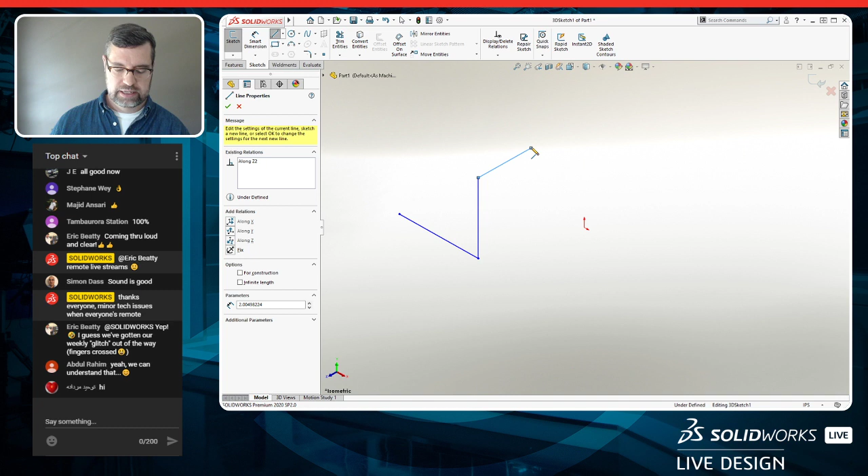So right now it's indicating that I'm in the XY plane. If I go ahead and click that and hit tab again, right now I'm in the YZ plane as well. And then if I want to be completely in a non-orthogonal direction, I can connect those two endpoints together. This is part of the reason why the Tinker toys are helpful, because this can kind of play tricks on you. But that's the idea, and the tab key is what helps to really facilitate that.

So that's tip number 1: get comfortable with the tab key. Tip number 2 is, if you do want to make sure you're locked into a plane, double click on it. Double clicking on the top plane locks my focus on that plane.

And now anything I draw is going to be in that plane. So we'll come up here, and there's quite a bit of symmetry in this design, so we're going to use a center rectangle.

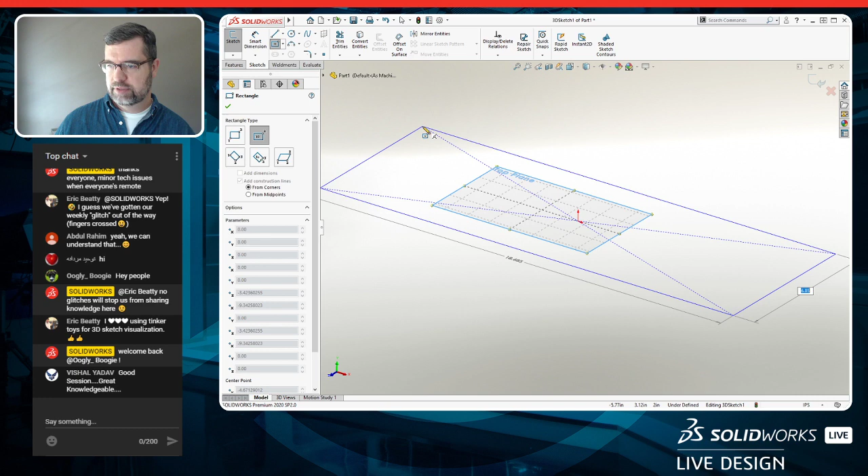Let's make this 33, and we'll make the other direction 60. Okay, so these are my dimensions. And again, you'll notice that everything I'm drawing ends up in that top plane, right?

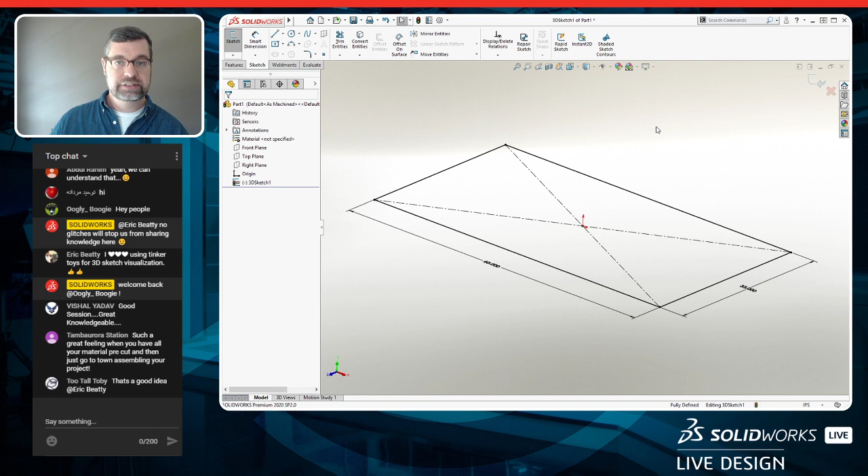And when I get out of this, if I just double click in the graphics area, now I'm still in the 3D sketch, but I'm back to drawing in any plane that I want. So the next thing we're going to do is draw one of the legs.

So we'll go ahead and click this endpoint and draw this down, and we'll make this 28. Now I'm actually going to avoid putting the dimension on here, because this is the third tip I want to give you guys.

When you go to add a dimension, by default it attempts to add the dimension in the plane that's most closely parallel to the screen. So if I select this line and draw off my dimension, you can notice it's orienting most parallel to my screen. If I escape out of that and rotate this around, I can dimension this way, and it's now coming off in the XY plane.

So here's my third tip: if you start your dimension and realize you actually want it oriented in a different plane, the tab key becomes your friend here. If you hit tab once before you place the dimension, it almost looks like it disappears. If you hit tab again, it toggles the dimension to the other plane.

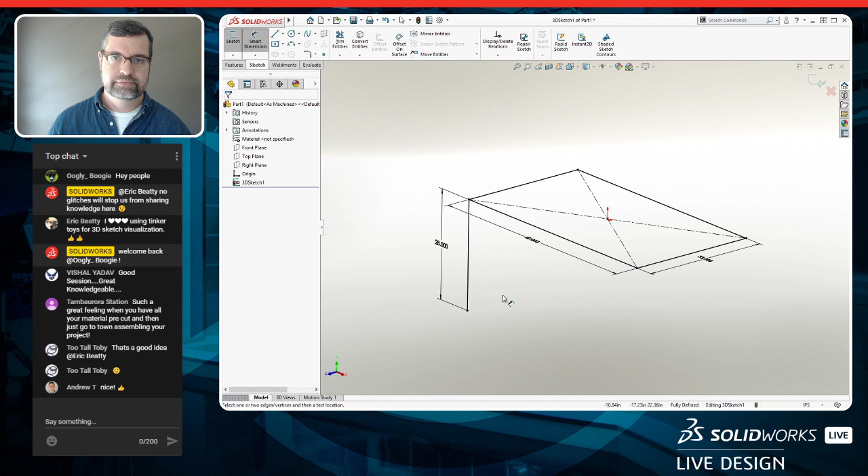So, three tips for 3D sketching. Like a lot of things, it comes down to learning it, practicing it, and then keeping it simple.

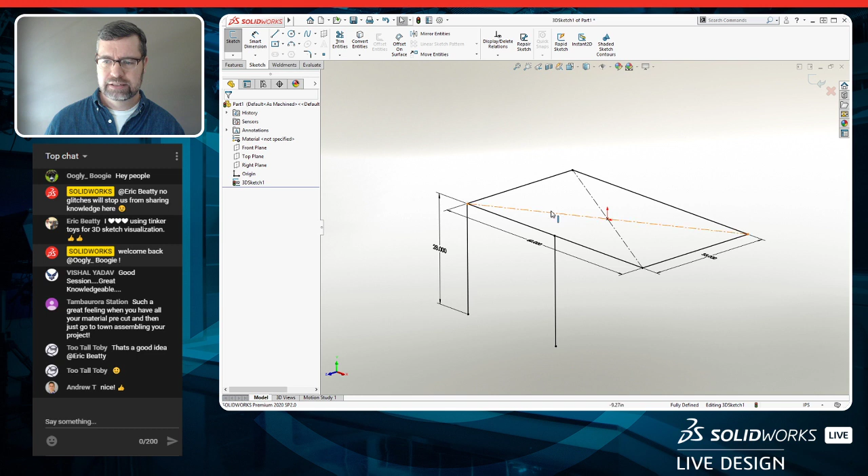I am going to go ahead and add the center leg in here. We're going to make this and this equal to each other, like so. That's going to be our layout for the majority of this design.

Okay, so here we go. So we've got our layout, that's looking good. Let's go ahead and start adding our lumber to this kind of skeleton sketch that we have.

My colleagues have done a really great job of giving some insight into how to build custom profiles. If you haven't watched Mike Sandy's or Jordan Tadic's or Juan's, those are all other great examples of utilizing the Weldment environment. They also have access to wood profiles you can download, or tips on how to create your own, so I'm not going to go into that today.

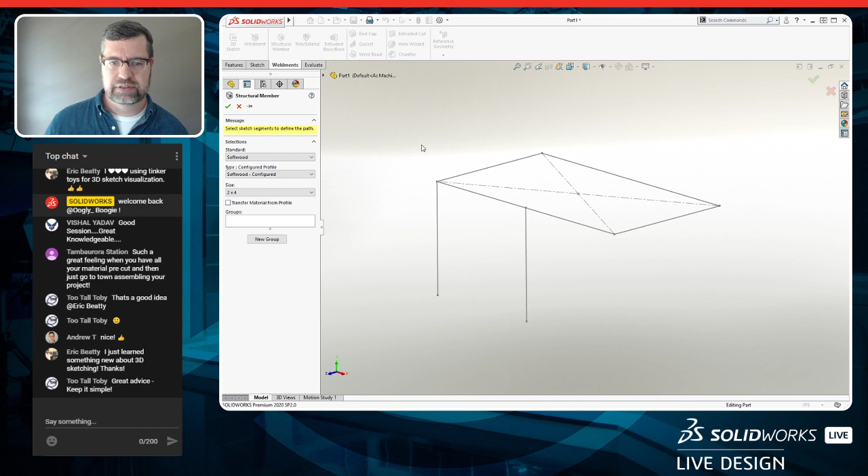We're going to focus on just a few other things related to building this out. So here we're going to make this out of 2x6, and we'll go ahead and place it on, just start picking the lines we want to add this to. Let's kick this around to 90 degrees, and we'll locate our profile to this point right here on the corner.

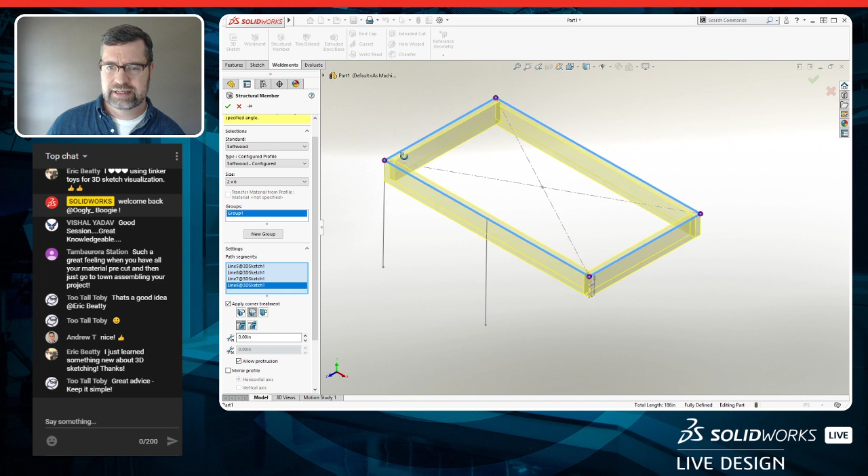Okay, so at this point, let's also select, now that we've got it oriented. I like orienting it first personally, and then I come back and pick the rest of my segments. We're not going to miter these, they're going to be basically end-butted. So we want to make sure this one gets switched over, like so, and same with this one. Right, so that looks good.

Okay, so we've got our first box in place and going, and now let's just use a simple pattern to make—we're going to basically do 3 stacks of those. So we'll come in, grab our pattern, and indicate the direction we want to go.

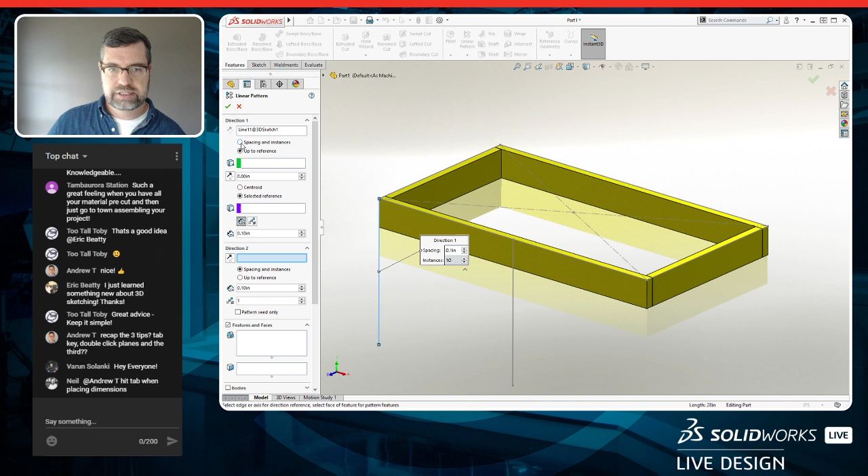This is going to be just basic spacing. These are 5.5 inches—typical 2x6 is going to be 1.5 by 5.5. So we're just going to space these at 5.5, we'll use 3, and then we're going to choose the bodies that we want to pattern.

Right? So something like that. That looks good. And we'll go ahead and hit OK.

So as I said, I made these out of pine. That was one of those things where there were kind of three things that I looked at. The materials had to be readily available, I didn't want to break the bank, and I wanted it to be food safe. So I ended up doing it out of pine.

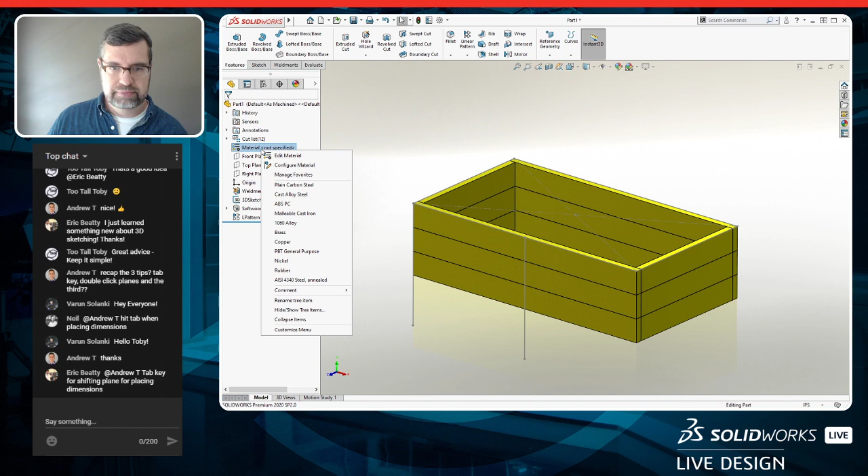So let's go ahead and add a material to this. There's actually some wood placed in your libraries, in this case pine. And just as a side tip, a lot of people don't always realize that if you use materials a lot, you can come over and click on favorites and add it to your favorites list. Obviously order these however you use them most, but this makes them really accessible so you're not having to go through the full library each time, right?

So there we go, we're going to go ahead and make this out of pine. Looks good. All right, so we'll go ahead and add the legs in.

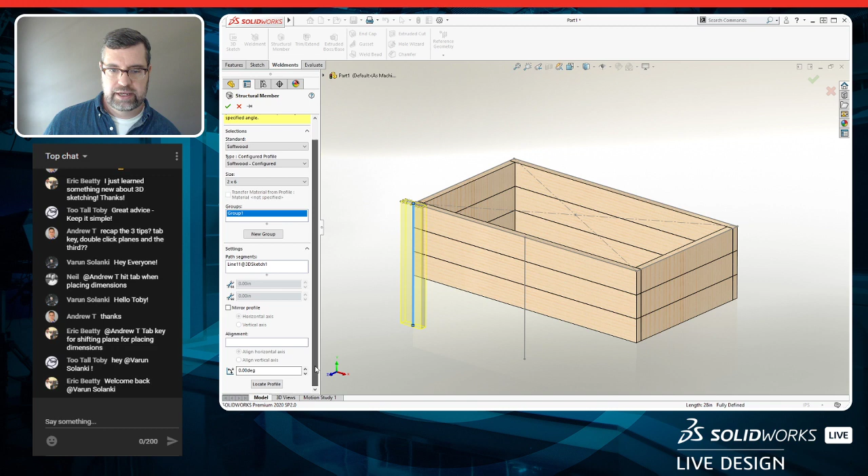So again, we'll use this as a structural member, 2x6, grab this line right here, locate that to this corner, like so, and that looks good.

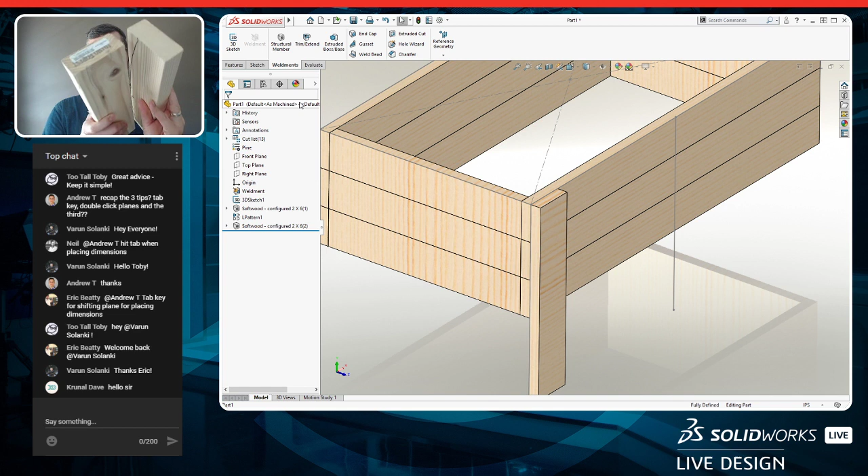Now we're going to do the other side of the leg too, and this is one area where I did tweak the library profiles, and I'll explain why. Specifically in woodworking, it's not uncommon to take two boards and lap them right over the top of each other, so that you've got something to screw into. So what I did with these profiles, and you may have noticed it already, is I went in and added those common lap points to my profile.

So if we rotate this around 90 degrees, and then go in and hit locate profile, what you'll see is I've gone into that library feature part and added those common points where you're typically going to overlap another thickness of wood. That's oftentimes going to be 0.75, which is that point, or 1.5, which is this point right here.

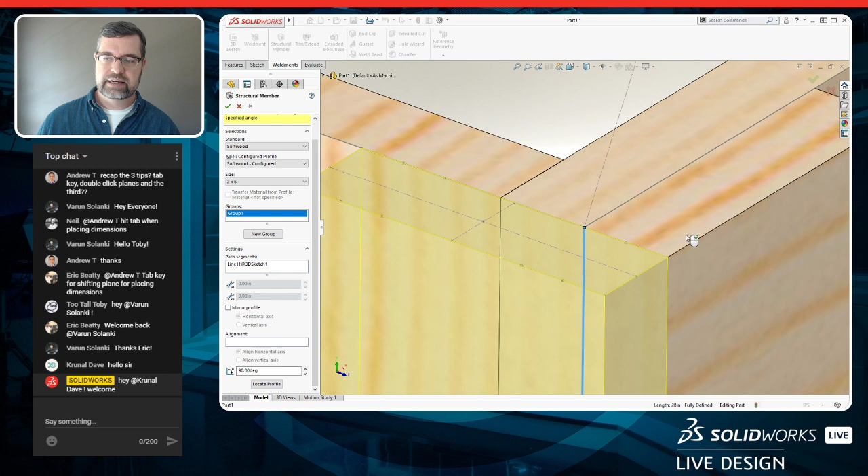So by doing that, I don't have to create an extra sketch just to place this board. I can just pick that from my profile. Again, it just saves me some extra time and simplifies how the model looks, keeping it nice and clean, right?

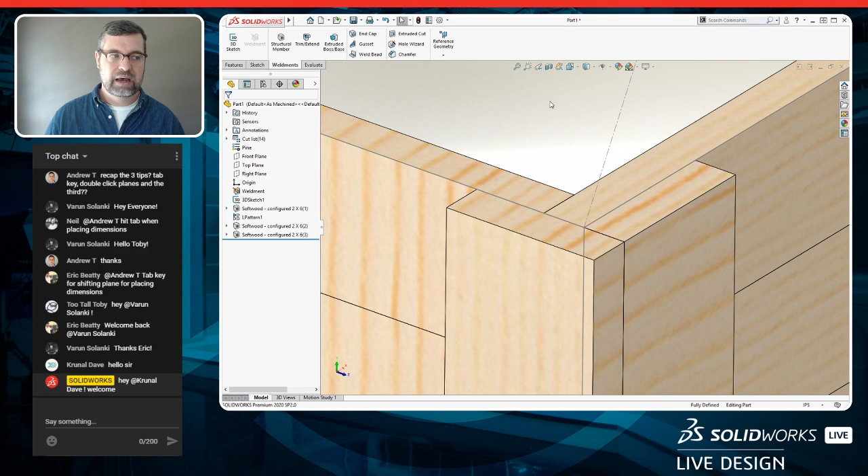This actually can be applicable to actual metal welded structures too. If you've got your plate steel set up as profiles, oftentimes you may want to do a scenario where, if this is your plate and this is the radius on your tube, you can run your plate right up on the tangent of that radius, and that gives a spot for you to lay your weld on the tube, if you're going to actually put plate steel on your tube.

So incorporating that point into that profile just helps you add those offsets in, those really common offsets that you're doing a lot, without having to create an extra sketch line or do some crazy things with your skeleton sketch. So just something to keep in mind - if that's something you do, then yeah, that's something I would definitely recommend.

All right, so let's go ahead and also add in the center leg. We'll locate the profile, we're just going to center that up right there. That looks good.

And like I said, there's a lot of symmetry to this design, so let's go ahead and get back. So we added our center leg to this design, and that was just a matter of coming in and selecting the line where we're going to add that 2x6, and then we're going to mirror these others to the other side. So we'll come in and do a mirror.

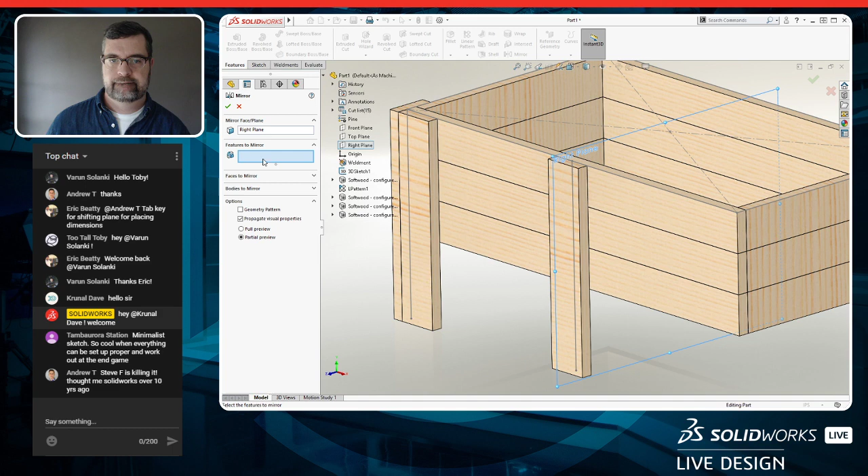Again, we'll do the bodies to mirror here, here. That looks good, right? So we've got half of this ready to go.

Okay, so let's rotate this around. We're going to go ahead and add in the runner, and the runner is what's going to support the slats that we have coming across here.

This is another great tip that a lot of you probably are aware of, but if you click on a face and you want to pick the face behind it, just hit this icon, select other. It gives us a chance to pick that bottom face of the board where we want to start our sketch. And I have my sketch, like insert sketch, mapped to a hotkey.

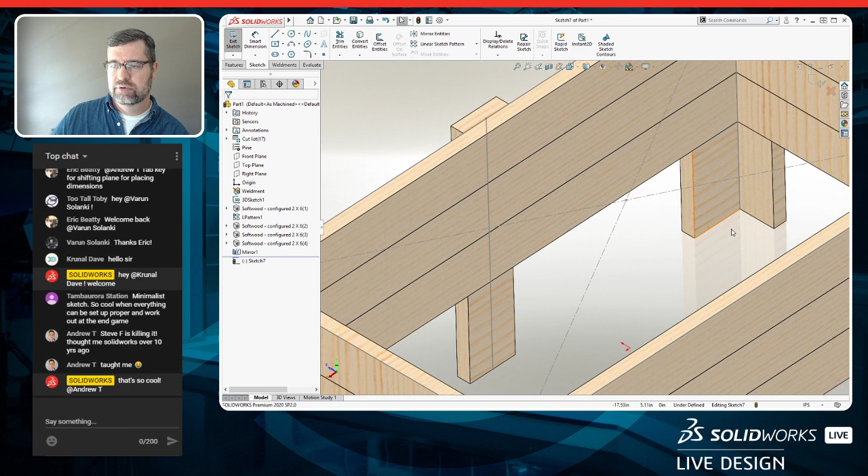Some of you may have it mapped to the shortcut keyboard or mouse gestures. I use it enough, and I like keyboard shortcuts, that I just map it to a key. Maybe in the comments, what do you guys use? Do you like using the wheel, or do you like using the shortcut keyboard? What's your favorite way to get to your commands?

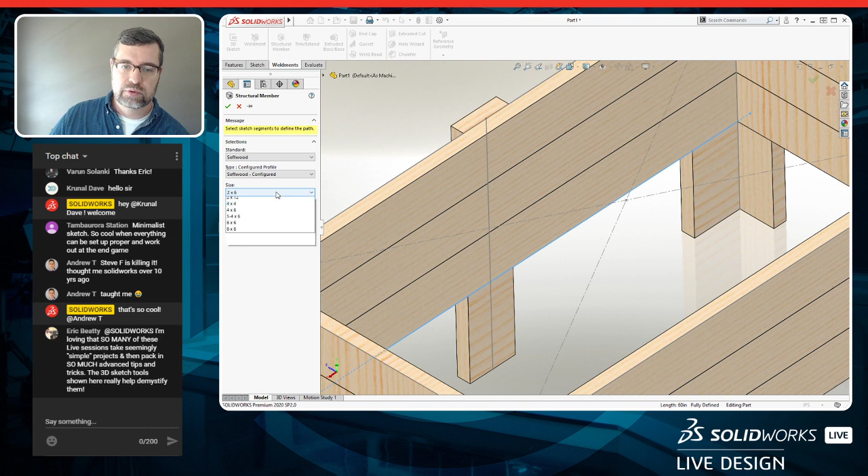Okay, so here, let's go ahead and just take that and convert the edge into a sketch. And then we're going to select to add this, it's going to be a 2x4 that we add here. So we'll select 2x4, select the line. And again, we're just going to orient ourselves 90 degrees and locate the profile.

Okay, so now we've got the board that's going to represent where we're going to put our slats for the runner. And the thing about this is that right now I'm interfering with the geometry, and I know that, I can see it.

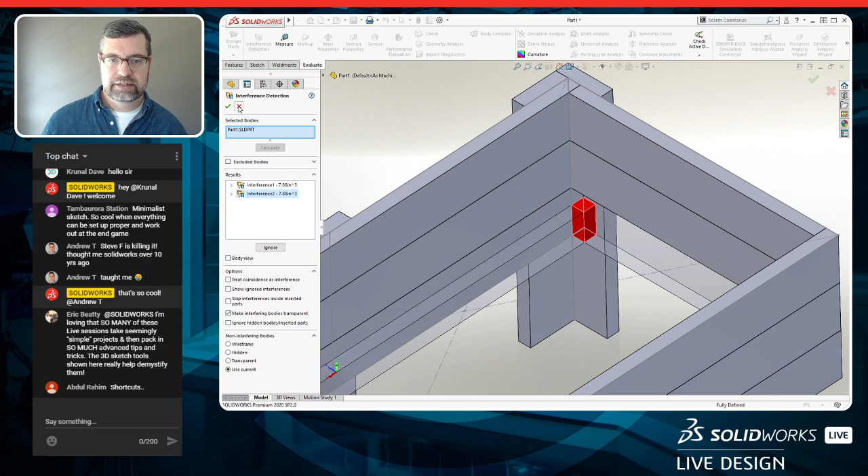But just as a quick tip, interference detection actually works inside of parts. So you can go to the Evaluate tab, select Interference Detection, and calculate, just like you would in an assembly. And you can see exactly where you may have interferences with your weldment. Okay, so keep that in mind as you're designing. You can do interference detection on your weldments.

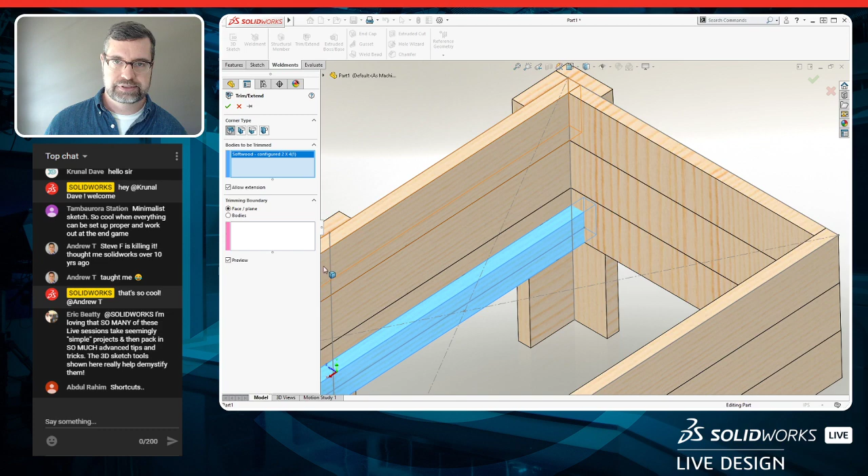So what I'm going to do to get rid of that is use the trim extend command. So trim extend, we'll select what we want to trim, which is the runner, and then we're going to pick the two faces that we want to trim up. So these two faces. And then I'm just going to draw your attention to this section down here at the bottom where we have the weld gap.

And weld gap can be really handy for when you're doing actual steel structures. One of the things I would recommend is definitely talk to your fabricators and your welders, because they oftentimes are going to have, you can make their life easier a lot of times if they have just a little bit of play in the structure, in the cut lengths, because you can fill in or bridge a lot of gap with weld. And it may make their life easier as they go to fixture it up, because they're not having to fight it as much.

The other nice thing about this is that if for some reason it was too long or it didn't quite fit, that typically means they've got to do a lot of grinding on the end of it. So main takeaway is, talk to your welders. You can make their life easier, and you can design better products in the meantime as well.

But what I'm going to do is actually add a gap in, because wood isn't always perfectly straight. And sometimes it's got different cambers to it and different bends. And you may be, if you're just slightly out of square, having a board that is the exact length, you're going to end up fighting it and putting undue stress on it.

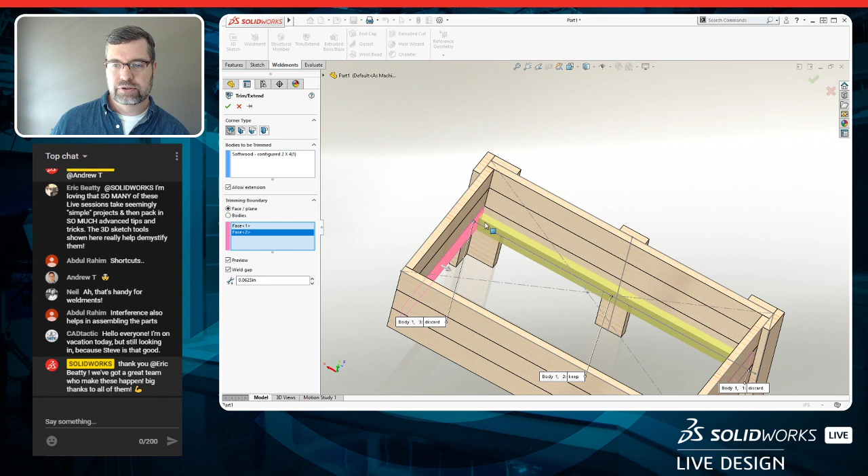So I put about a 16th inch of a gap in here. That ends up being an 1/8 inch either way. And it helps to, especially in a structural setup like this, make your life a little bit easier. You're not fighting that board to get it in. It just fits in there nice and you can center it up accordingly.

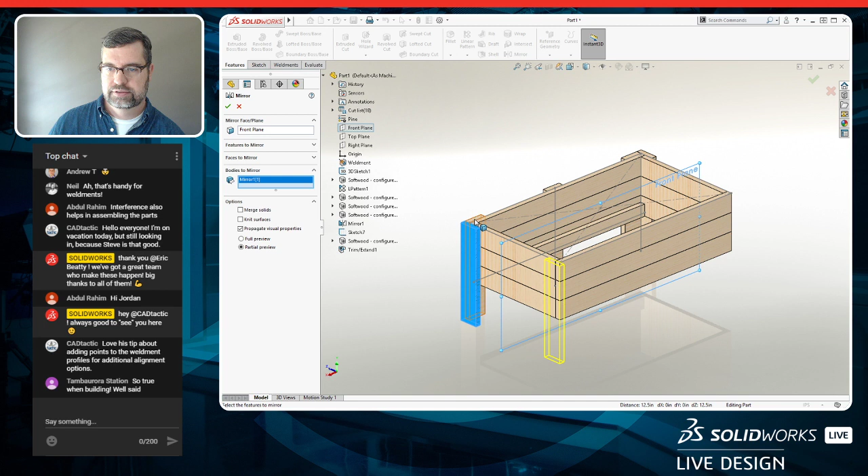Okay, all right, so there's our design. We're going to go ahead and just mirror all of that to the other side. Okay, so we're going to do that across the front plane. We'll grab our bodies, and that's just going to be each of our legs and that runner piece.

Okay, all right, so here's our design so far.

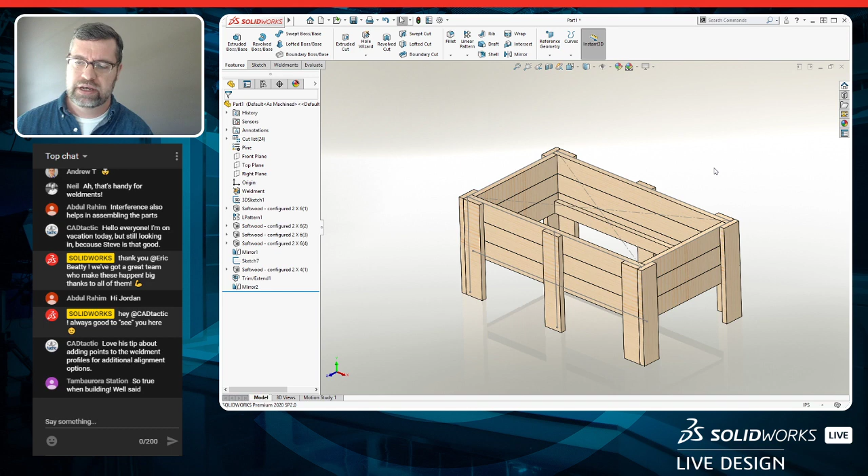Let's go ahead and add in the slats. Again, this is just going to be a sketch that we start on this face. Now remember, we've got a little bit of a gap here, so I'm actually going to pull this line up, pull the edge off the board of this face into my layout sketch, because I want the slat to bump right up against the edge face here, and this is going to be again a...

2x6. So yes, these are beefy garden boxes. All right, so it's going to be 2x6. We'll just go ahead and locate the profile right here, like so.

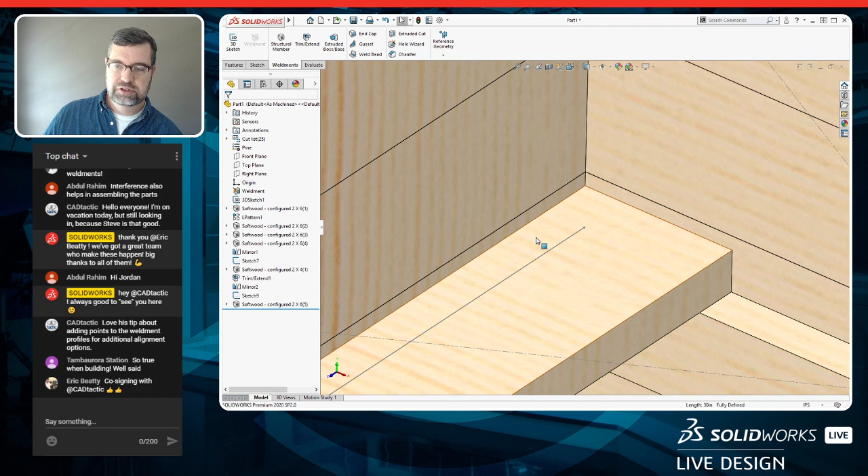Now, here's the thing about this one. This doesn't have any interferences, okay? The 2x6 butts right up against this face, and the end of it butts right up against this face. But something to keep in mind, even though I don't have any interferences, I can still use the trim extend command to build in the weld gap.

So instead of having to mess around with the length of that line, I can say I want to trim this. You go ahead and pick the faces that you want to reference, so this face and this one. I'm just able to use that feature to add the gap in that I need, right? So I'm just going to go ahead and hit OK.

Same idea here. When I go to put this board in, I don't want to have to fight it, right? To get it in there, and a little bit of play on each side just ends up making everybody's life a little easier when you're building something like that.

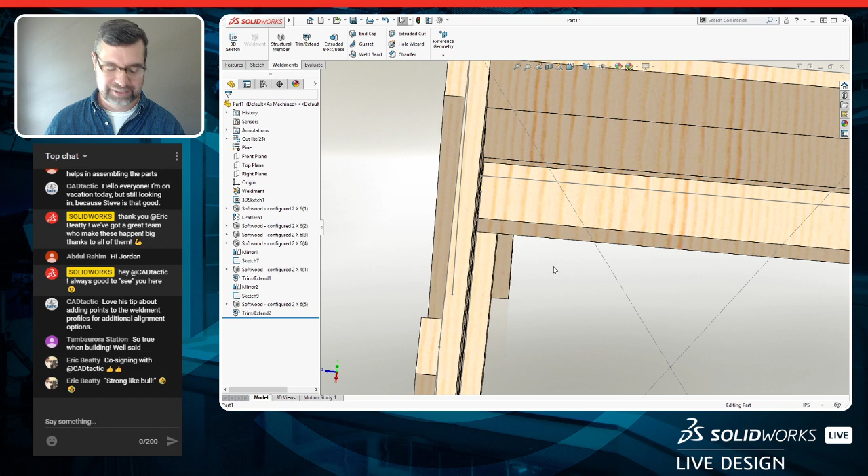Strong like bull. Yeah, exactly, Eric. We have a saying in Indiana that when in doubt, build it stout, right? I think that's probably kind of a ubiquitous saying, but we tend to own it.

So, at any rate, we've got that in.

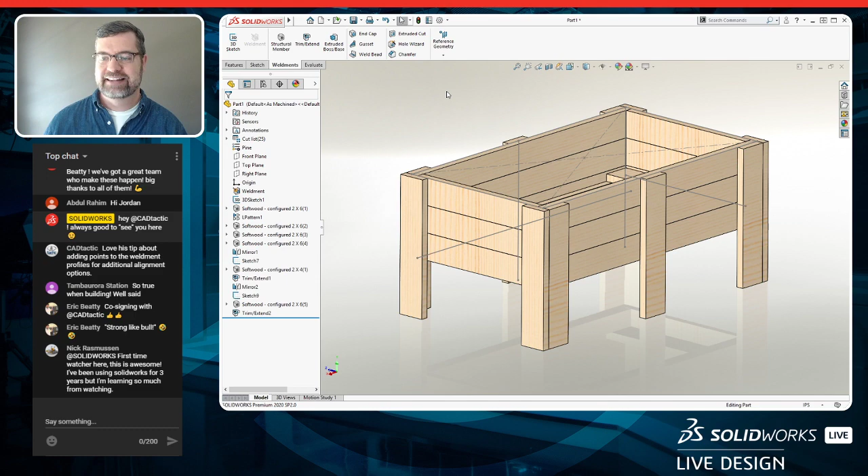Now, this presented one of those interesting challenges that SolidWorks was great for solving. When you do a box like this, you actually have to have a way for the water to get out of the box, so you can't just butt these slats up one against each other all the way across. You actually want some spacing, and I was shooting for about 1/4 of an inch or so.

And I was like, oh man, now I've got to figure out how many of these I need and all that stuff. And then it dawned on me - wait a minute, we've got this feature inside of linear patterns that allows me to basically just indicate up to reference. So I can pick the direction that I want to do the pattern, and I'm going to use the up to reference, and say I want to basically pattern up to this face.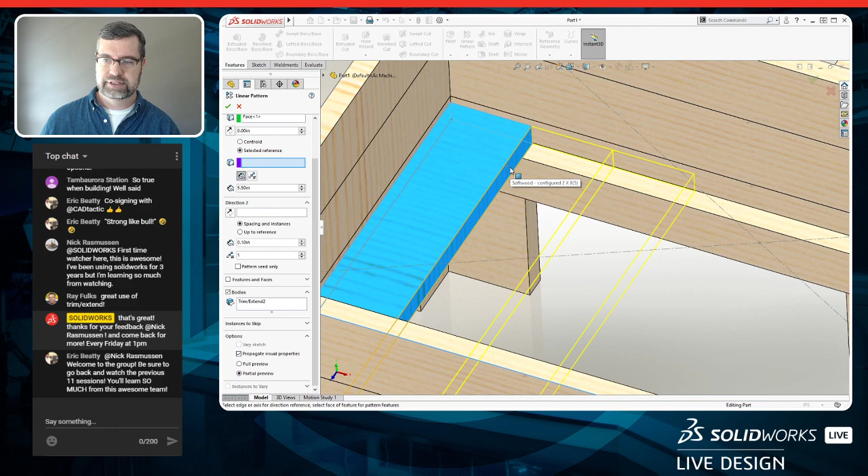And I want to select the bodies here that I want to add, which is this one. And then I can indicate where I want it to be kind of referenced from. In this case, I want to use this face here.

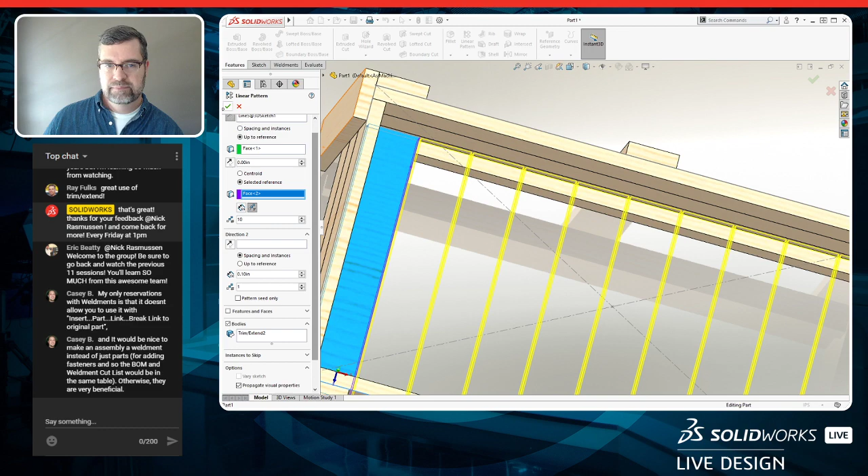And then I'm going to start playing around with the number of instances I need, right? So now visually I can just start seeing, okay, it looks like 10, 10's going to fit great. You could also do this based on just driving the distance that you want, but that worked great, and like I said, I was just wanting something fairly close.

And this is one of my other tips. A lot of times I think we have to use the measure tool to figure out dimensions, but a quick thing - if I just pick two faces, hold down Control, pick two faces, you can identify the distance right there in the normal distance down here at the bottom of the screen, right?

So yeah, it's looking pretty good. We've got our spacing in there that we need. And the last thing we want to do is put a little bit of trim around the top of this. It just kind of cleans it up.

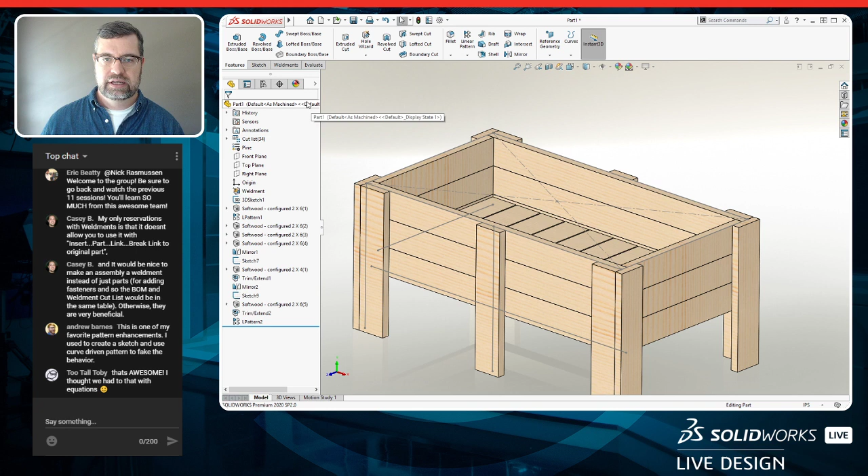You don't have to do this, but inevitably you're going to be leaning over and likely need to set something on there. So we're going to go ahead and do a structural member. I'm going to put a 2x4 around the outside.

Having those offsets in your profile becomes super handy, because you notice I haven't had to do a whole lot of sketching other than this line and this line outside of what my skeleton sketch was. So if you come in and locate your profile again, I can simply pick the point that represents my 1.5 inch offset, and that gives me the perfect amount of lap to where my board is.

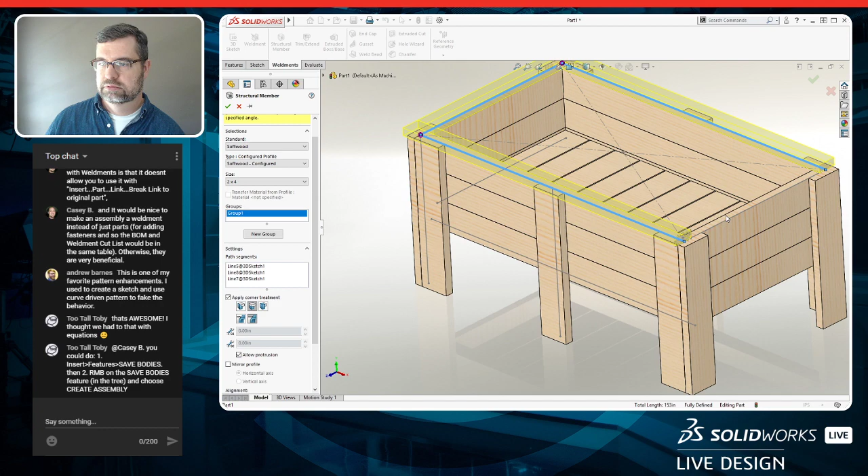Easy enough to do. We'll go ahead and pick the rest of our lines. Now, this is an option - depending on your comfort level, you actually could just leave these just like this. And I'm going to grab my endpoint here and set this one so it extends out.

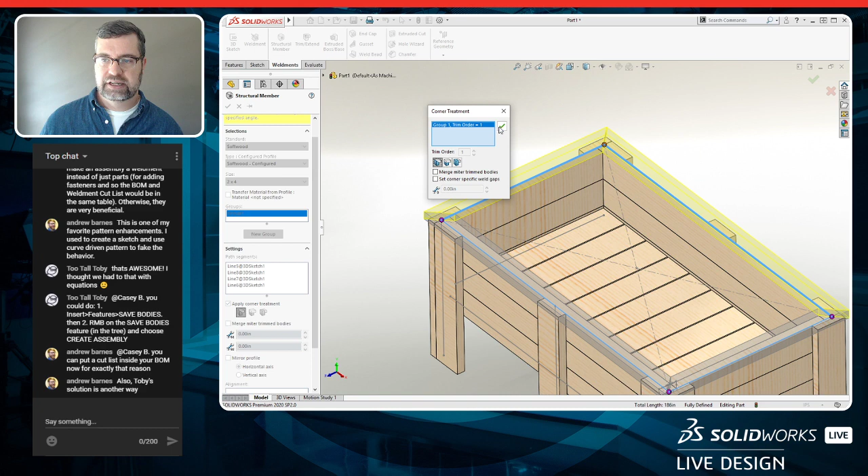If you don't have a miter saw, or your miter saw only does straight cuts, this is an easy way to just put a nice little trim board around the outside without any additional complication. Alternatively, you can throw a miter in there, and it adds a nice little touch, gives you a nice clean corner. So it's up to you based on the tools you have and your comfort level. A straight chop will give you a real nice trim as well - miter just adds a little bit extra.

All right, that's looking good. Let's go ahead and save this, and we'll call this garden box.

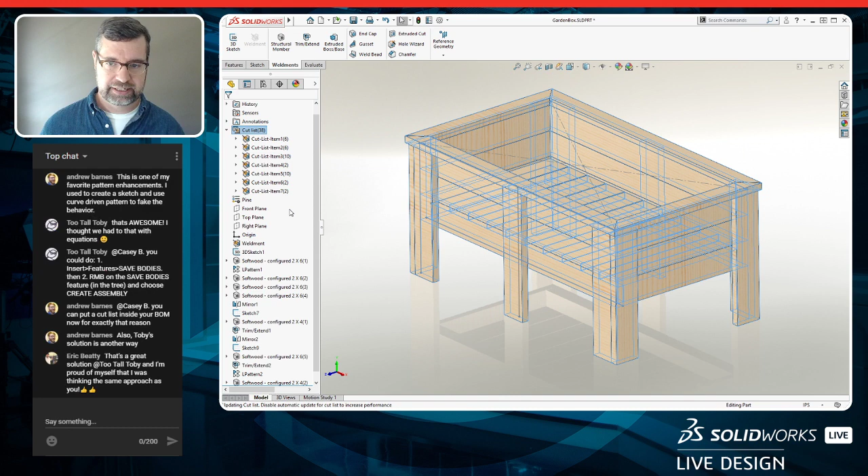So perfect, let's do some stuff with drawings now. If you're kind of new to Weldments, we've got our cut list - simply tell this to go ahead and either update or update automatically, and it'll constantly update as you're designing. Now I've got all my cut list items, which is great. Let's go ahead and create a drawing. I want to show you a couple things with drawings that will be helpful for this project, but also just in general when it comes to documenting your designs, whether they're steel or other.

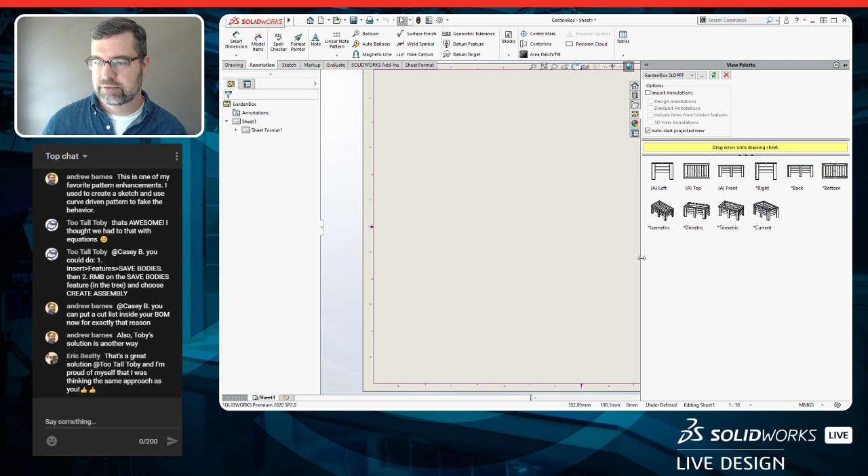That'll be handy. So let's start with, we'll put an isometric view on here, and let's just hide sketches since we're not going to use those. Now here's a couple things - maybe you're using your work computer, you've got your work templates. This is something we want to document in inches as opposed to metric.

So down here in the right-hand corner, easy way to switch your units - just come up here and say I want to do this in inches, since this is just kind of a home project. So that'll switch our units, and now we're good to go.

Let's go ahead and also add a Weldment cut list table to this. So we'll do Weldment cut list, just accept the default, which will work good for this project.

I also want to point out that all of our lengths are in inches, which is great, that's what we wanted. But now also, they're in decimals. I worked as a machine designer with fabricators for a while, and oftentimes they're just cutting the steel with a chop saw or a bandsaw. If it's a one-off, a lot of times it's actually a guy with a tape measure, and he knows what the decimal values are, but a tape measure obviously isn't in decimals, so you can make their life a lot easier if you switch it to fractions.

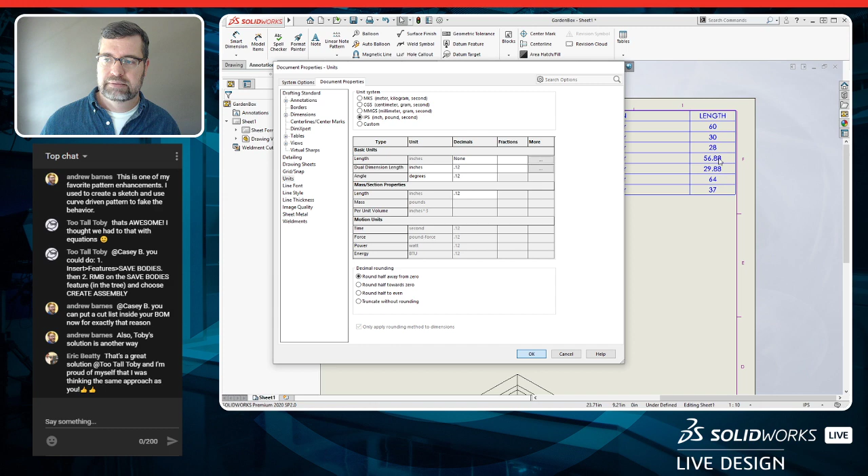And your options - you can come in here and say edit document properties, it'll take you right to this area. And you can say I want to do this in fractions, let's say 16th, and round to the nearest fraction. That will actually control not only your dimensions, but it controls how your table is displayed as well. So that drives both.

All right, let's add some balloons, right? So how are we doing in the chat here?

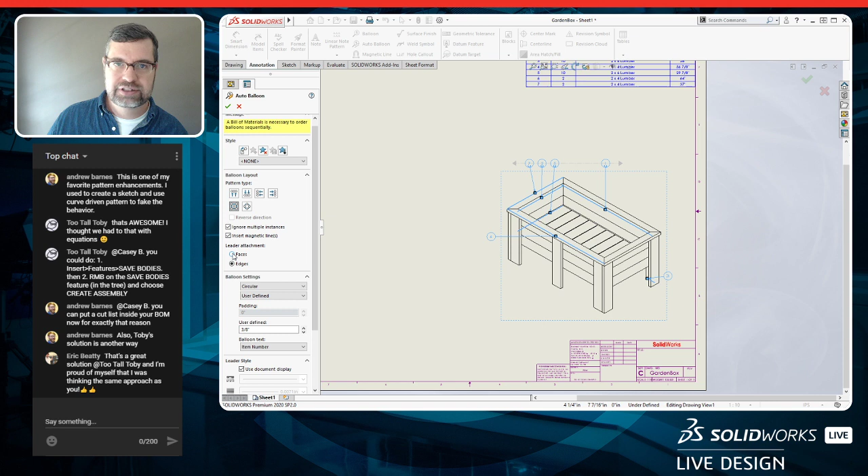We'll go ahead and auto balloon. Couple preference things, just me personally. When you have a lot of line-on-line contact like this part does, one of the things that's kind of handy is you can change the leader attachment so that it's attached to the faces. This will reattach the balloons so that their endpoints align on the face, so you can readjust those to where they need to be.

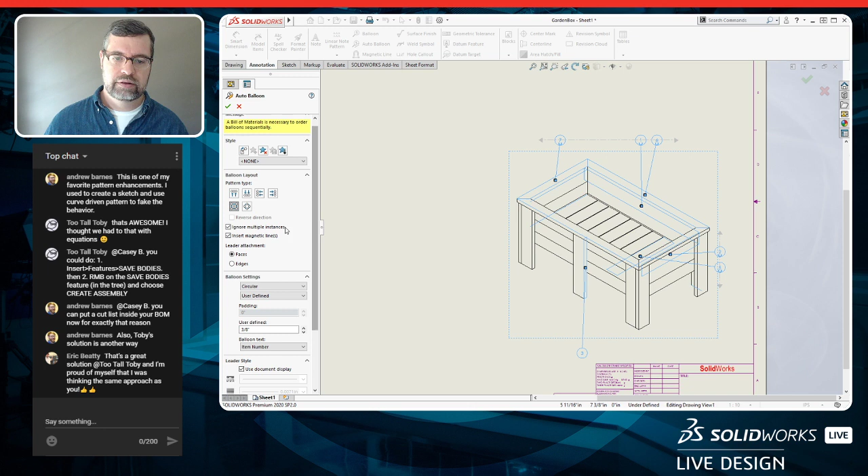The other thing that I find helpful sometimes is to uncheck this ignore multiple instances. Now, yes, you will end up with a lot more balloons, and there's situations where you don't always want to do this, but it can come in handy when you're looking at a certain part of the drawing and want to verify that all three of these boards are item number 2, or whatever it might be. It's also handy just to be able to clean these up so you can see exactly the face or the part that it's associated to.

Completely up to you on what your preference is, but these are just some things that personally, and actually when I was building this, I was like, man, I really wish I would have called out some of all these boards so I could easily look at them and see what they were.

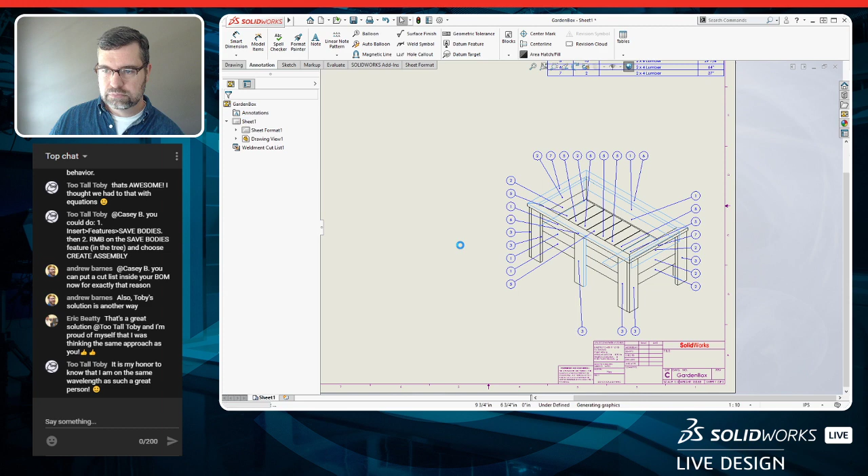All right, so that looks good. Let's add a couple more views on here. So let's add our front view, put a top view, and then a right side view.

And I'm also going to go ahead and just change the scale of these. Let's just back them down a little bit. Maybe not that much, 1 to 100 is a little much. We'll do 1 to 12 here.

Obviously, you can come in and add some dimensions. Another thing that just came in handy when I set these, I actually put them up on concrete blocks, so I made sure everything was level, and I needed to know center to center of the legs. Obviously, if I throw a dimension from here to here, that's center to center.

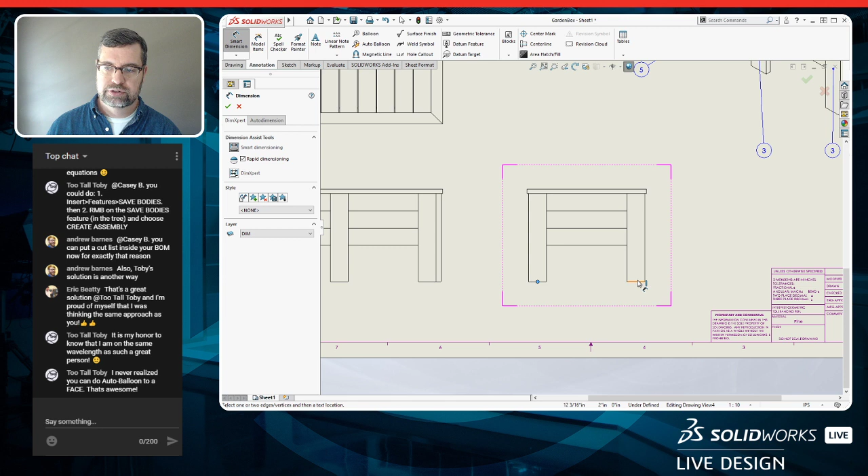But just for the sake of showing another option, if you right click on an edge instead of left clicking, you have the option to say select midpoint. And then you can do it over here too. I can say select midpoint, and that'll give me the distance. You can just say I want to keep this dimension driven, but that now will give you your reference the center line of those edges. Like for me, I could tell exactly where I needed to put my concrete blocks that I set this on.

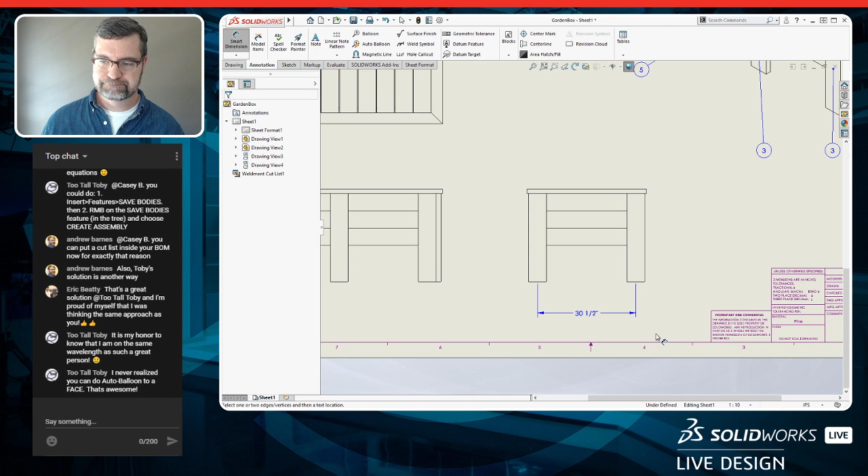Another thing that's handy here as well is you can come in and do a detailed view. Let's put this on here. Because maybe I want to be able to reference the distance in between my slats.

So this is where rounding the fraction can come in handy. If you remember, the actual distance between these two was 0.22. In woodworking like this, that's like a 30-second off of a quarter of an inch, so it's easier just to say I want a quarter of an inch. So that can come in handy.

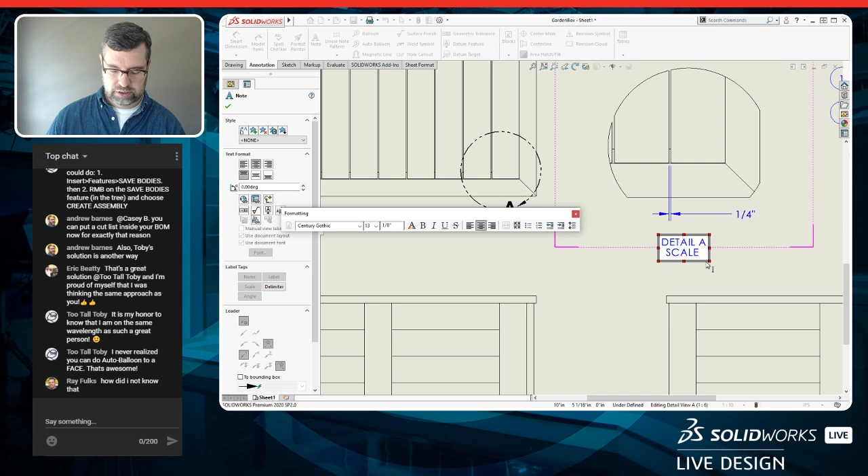My other tip, specific to detail views, sometimes people don't realize this, but if you want to change the scale and the detail, you can say, well, maybe I want this to be 1:8. You can actually do it right here. If you just double click on the annotation and say I want this to be 1:8, it will actually drive the scale of the detail view. So another little time saver - you don't have to make your way all the way over to the properties, you can just manage it there.

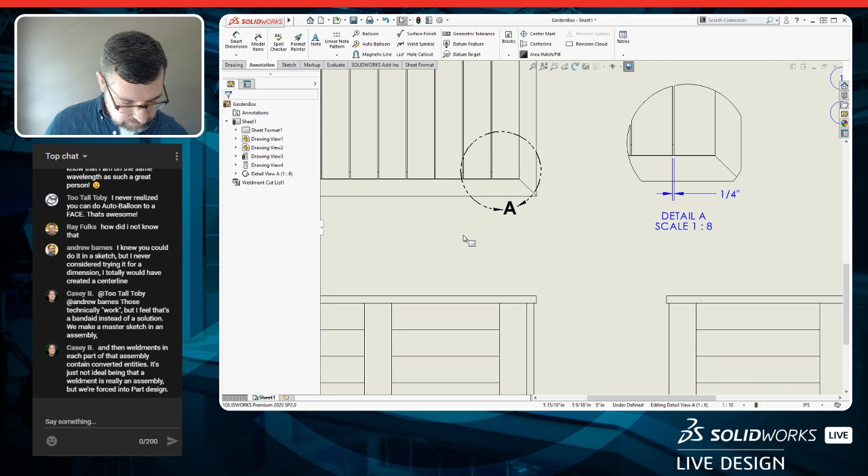Okay, cool. So good to go there.

So let's do this. This came up in some of the other live sessions. People were curious how to go about detailing parts on a weldment. I'll show you two methods and try to give a little bit of insight on why you'd use one over the other.

The first method: you come in and say drawing, choose a normal model view. We want to make it for the garden box. You can then say I want to do a top view, but select the bodies. If you choose this, it's pretty straightforward. You just pick the body you want, hit OK, and it places the top view of just that body in the orientation that it is in the model.

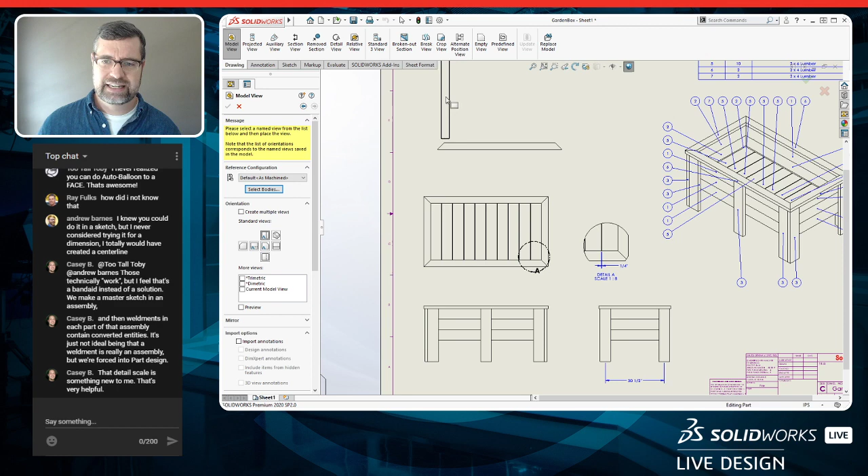Where you have to be a little careful, where it starts to break down a bit, is that it takes the orientation of the model itself. So if I do a model view again for the garden box and select the body, here's the thing - if I select this one, it's going to take that orientation, which isn't overly ideal.

You can actually get around this, and this tip applies to a lot of views - you can just rotate it. If you pick the rotate button, you can take the drawing view and spin it around to a different orientation. Why am I showing this? Well, it can be a down and dirty way to get a detail of just that part.

But it's also helpful if you do sheet metal weldments. So if you have multiple sheet metal parts and you need to show the flat for one of the sheet metal pieces, that's a way to get the flat into your drawing.

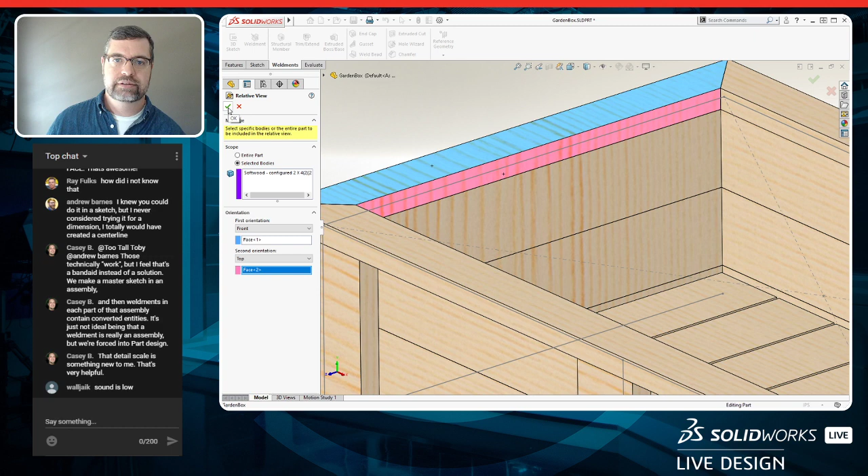The more robust way that gives you more control is to do a relative view. If I do relative view, I can select the model I want to use, select bodies, and choose this body. Then I can say my first orientation, my front, is going to be here, and the top is going to be this - so I'm actually controlling the orientation of the model.

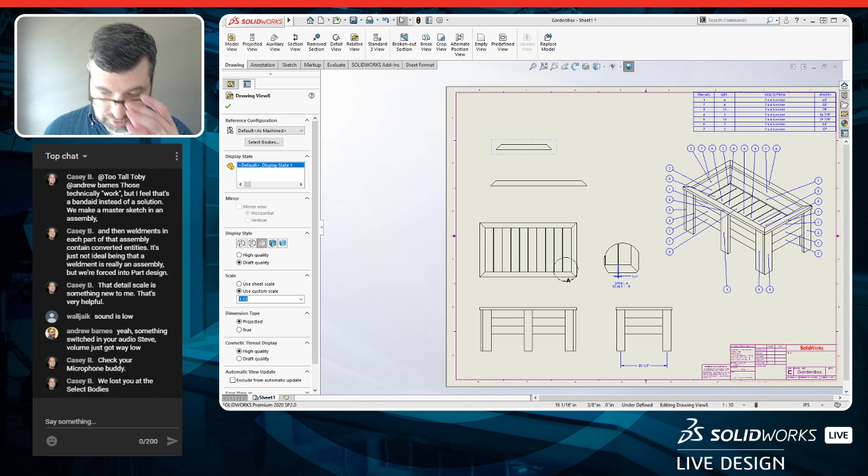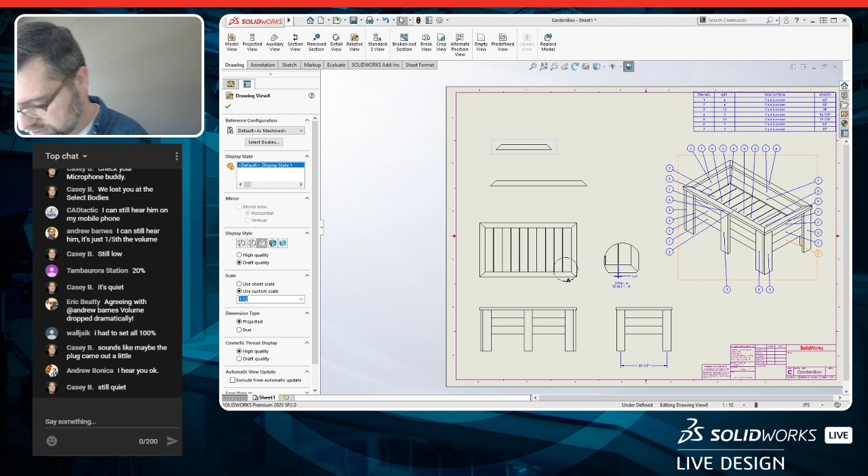My sound suddenly got... not as loud. Let's double check, make sure my microphone is still set. Turn up the gain - it's still showing that, let's turn the gain up a little more. Check, can you guys hear me? Lost me on select bodies. Are you guys hearing me now, any better? Something switched in my audio. So you can still hear me on my phone, okay that's good feedback. Are you guys able to hear me at all, or is it just quiet? It still says I'm using my mic here, the one I've got set. Still low. Okay, let's try to push on - maybe just try to turn the volume up a little bit. I'm not exactly sure why all of a sudden it's changed. Set to 100%. All right, sorry guys, I'll just try to speak louder. I'm not exactly sure what's causing it. Just speak in all caps from now on - I'll speak extra loud, we'll pretend like this is all in caps for right now.

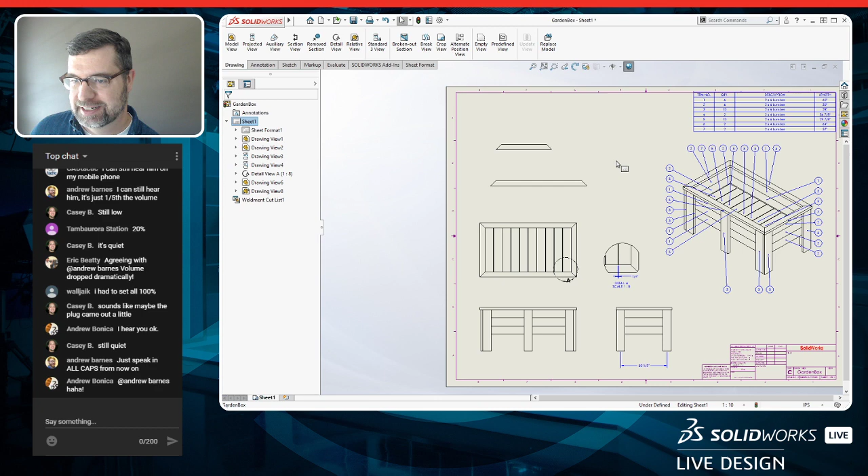Sorry about that, guys. So here we go - lost my train of thought. Okay, so here's the thing.

So now we've got the relative view. Another little tip here is that if you add the relative view - now it's gone completely. It's showing that it's on here, tough go at it today. Hey, we're back, okay, cool, all right.

So here's the thing: relative view gives you the most amount of control with how you place and how you orient the model.

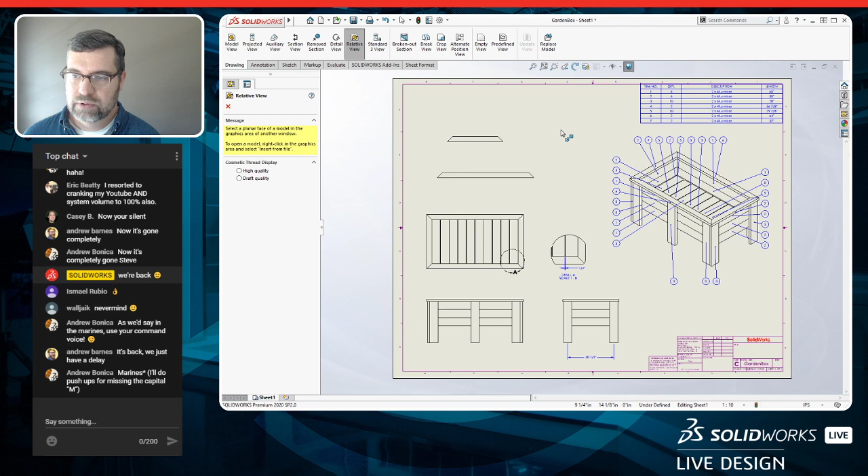Here's a little trick though - if for some reason you need to place a relative view that isn't the model you have on screen, you start relative view, then right click and say insert from file. This lets you go out and browse a completely different part file, and it'll allow you to create a relative view of that different file. Where this comes in handy is that you can create these details on different drawing files. So that's a way to do that - you just say insert from file, go out and browse, and it'll grab it.

Cool, so we've got that. We've got our two details. That's good. Next thing we want to do here, let me show you one other trick. A lot of times when you're creating these types of views with details, you want to put almost like little mini title block pieces of information on the drawing. So here's a little trick you can do.

Create your note, and the first thing I'm going to do is lock the focus of my view by double clicking on it. So by double clicking on it, anything you do now, any note you add, doesn't matter where you add it — I could literally add it out here, just make a note. This now allows you, if you move that view, that note will come with it. So that's one of the advantages of double clicking on the view to lock its focus: the note will travel with the view. And to unlock the view, you just double click on the drawing.

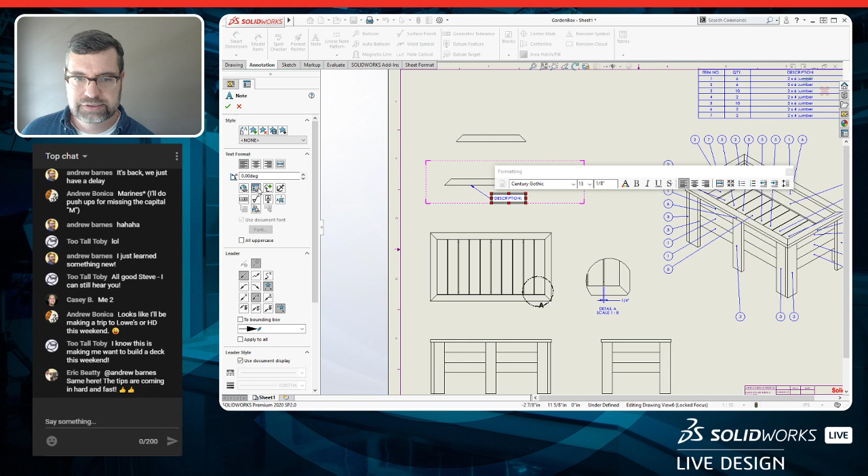So I'm going to lock my view. I'm going to come in here and add a note, and I'll use the leader just initially, okay. So we'll say description, and I'm going to link it to some properties. We'll say we want to link to the component to which the annotation is attached. Now here's the thing — this option right here, at least for weldments, only shows up when you've got a leader line attached, okay? And by selecting it, that's when the property names show up. So here's my description. I'll say okay.

I'll hit enter, and we'll do length as the other one. So we'll select length, hit our custom property, and add that in. So component to which the annotation is attached, we'll add the length, hit OK.

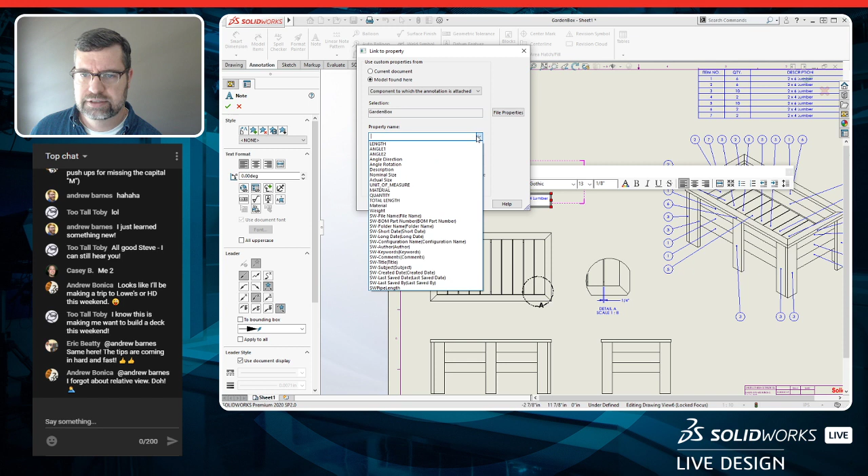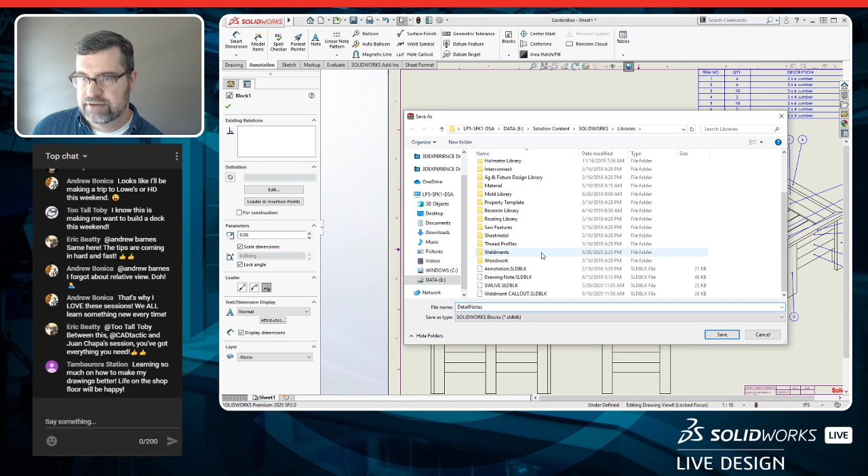Great, now that you have those two values, you can get rid of the leader line. So I'm going to come in and turn off the leader. I'm going to right click and make this into a block. So we'll make this a block. Then I'm going to come in and save this block — we'll just call it detail notes. Okay, call this detail notes, and I'm going to save it into my library.

And here's the thing — a lot of times you run into drawings where, especially on a weld drawing, you're going to have your orthogonal views, but then it's not uncommon to have a bunch of the piece part details on the same drawing, whether for reference or because they're going to make it off the same drawing. And if you have to go around to every one of those views and do this, it's just really time consuming. But if you make it a block, then you can just come over to your library.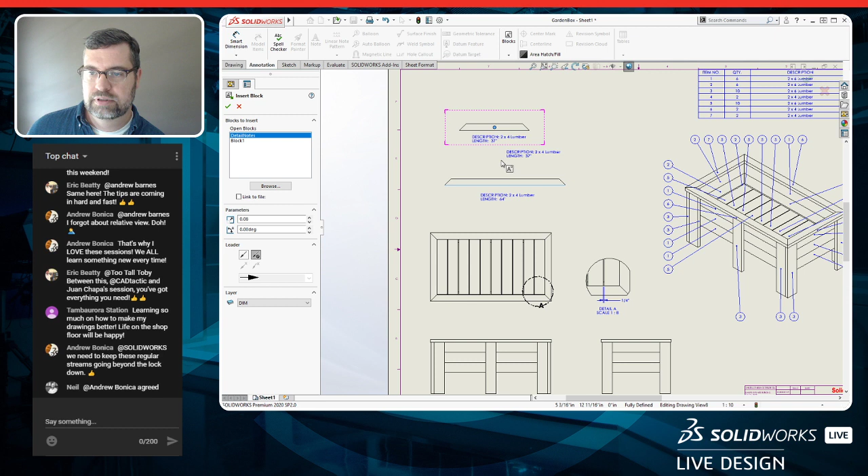Grab the note that we just created — in this case I'm just going to use one I already created, same idea. Oh, here we go, detail notes, this is the one I created. So we're just going to drag this onto this view. Let me unlock the view, that helps. So I unlock the view, and now if I drag this note onto the view, it fills itself out based upon what's already in the block. So now if you've got like 8 details on the drawing, you can just start dragging and dropping this block, and it starts filling that information out on the views.

So helpful here for this project, but also hopefully you see some value in that if you're actually creating fabrication prints.

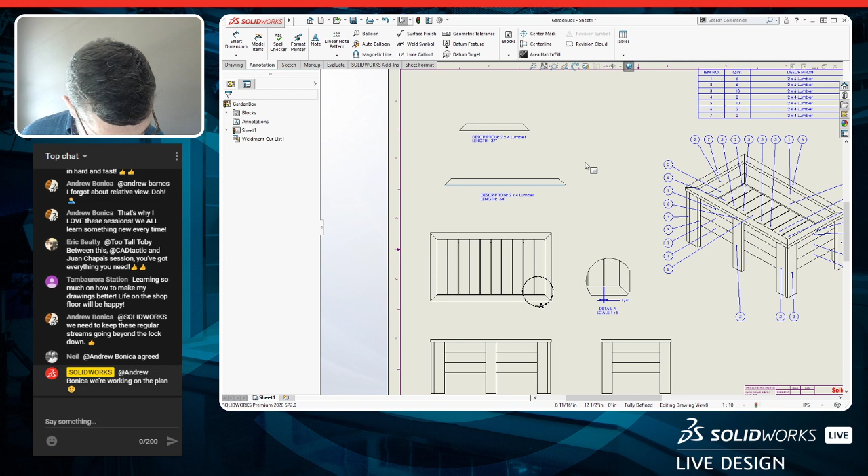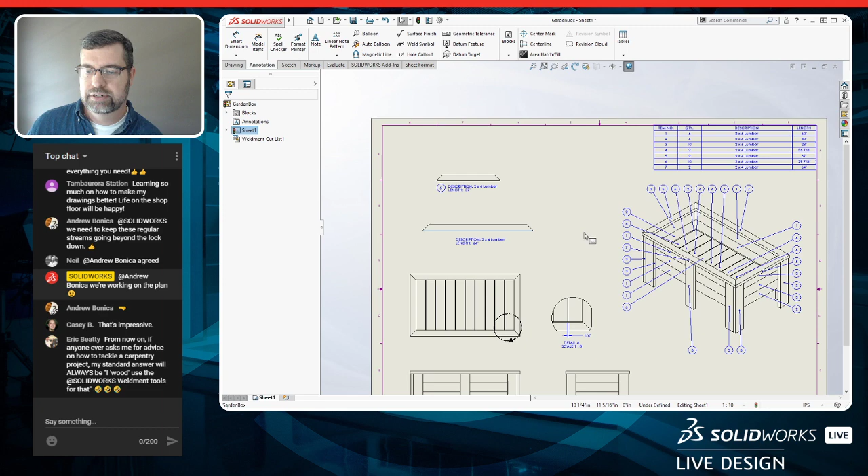Another tip - it's not quite as clean, but still helpful. If you want to tie this to the balloon, put a little note right there, like this is our 37, so that's number 6. Just click the balloon, and now it's dynamically linked, so if we decide this no longer needs to be number 6 but needs to be number 5, the balloon number updates too. You can link all this together and create a really clean drawing that has all your details and information on it.

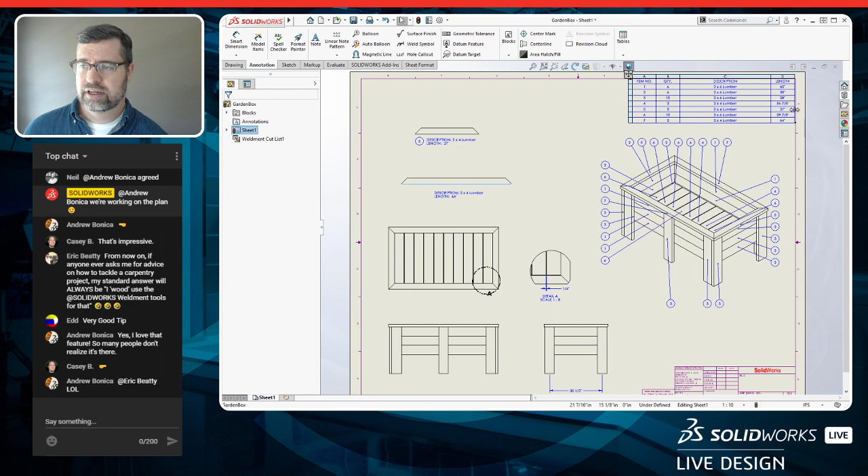All right, so we've got a nice looking drawing and a few minutes left. I want to show you two more things. First is a little utility I found that's super helpful when you go to create your cut list and buy your actual lumber. This is all of our lumber, with all our cut lengths - that's super helpful, but we have to be able to buy some raw stock to actually make this.

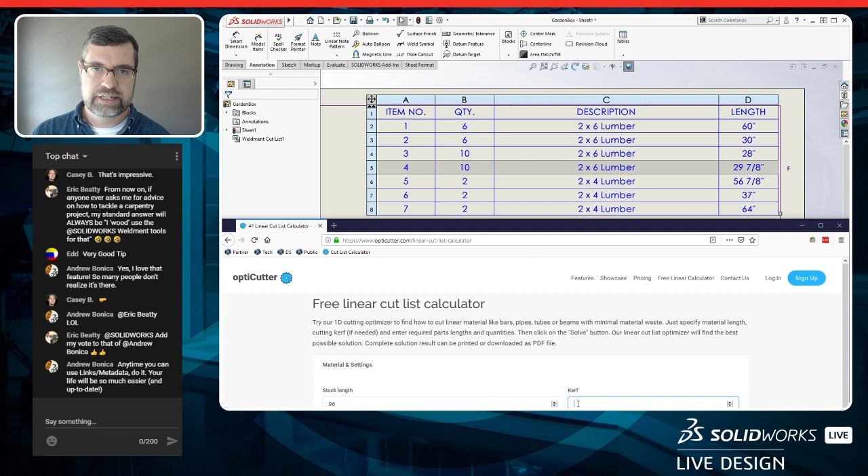One of the things I found is this website that really changed things and made my life so much easier. It's called OptiCutter. It's free, no cost to use. You can come in and say let's take our 2x6s first, and enter your stock length, typically 96. You can enter a kerf - if you have a saw cut, the amount of material the saw takes out is basically your kerf. We won't worry too much about that, but then you can start adding your lengths.

I'm going to come in and say the first length is 60 and I need 6 of them. Then the next one is 30 and I need 6 of those. Then I need 28, and we're going to do 10 of those. And we'll do one more - we need 10 that are 29 and 7/8, 29.875.

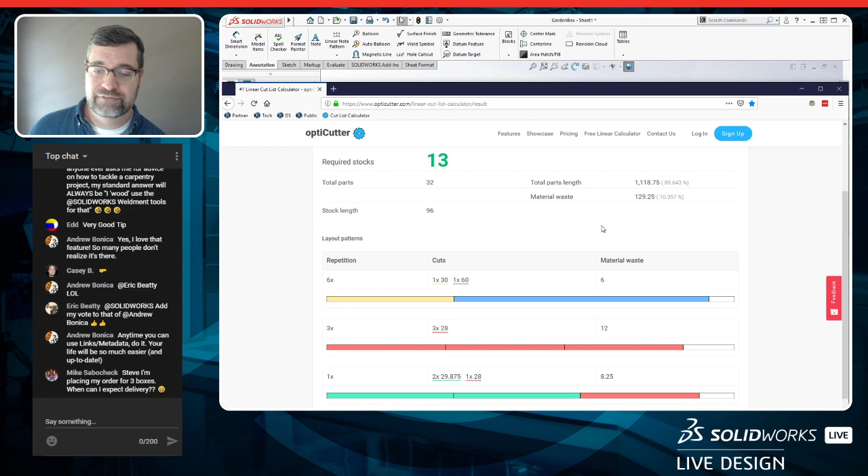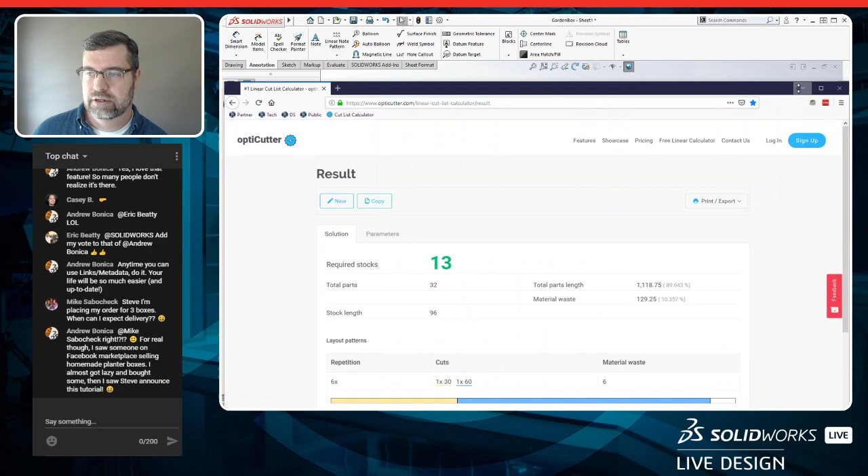So here's the cool thing about this tool - now I can say solve, and it literally gives me the full breakdown. I've got to go out and buy 13 2x6s. It shows me exactly what I'm going to cut them out of, which boards it's coming from, and it shows me the waste - how much drop I'll have from each board. You can actually print this, and then run it again for your 2x4s. It's super helpful for generating what you need when you go to the lumber or hardware store - makes my life a lot easier. So that was one.

The other bonus thing I want to highlight, since we've got a few minutes left, is that weldments are part files, and part files allow you to save geometry inside of them. What does that mean? If you design a lot of frames and let's say 80% of them are always the same, model up your frame and make it a template - have a weldments tab. If you do machine tables, tables that your machines sit on, have a template where all that geometry is already there, and all I've got to do is adjust my layout sketch. Because weldments are part files, they can contain starter geometry. This becomes a really quick way to say every time we build one of these tables, it's always the same except we change these 5 dimensions. This gets everybody going in the right direction on the design.